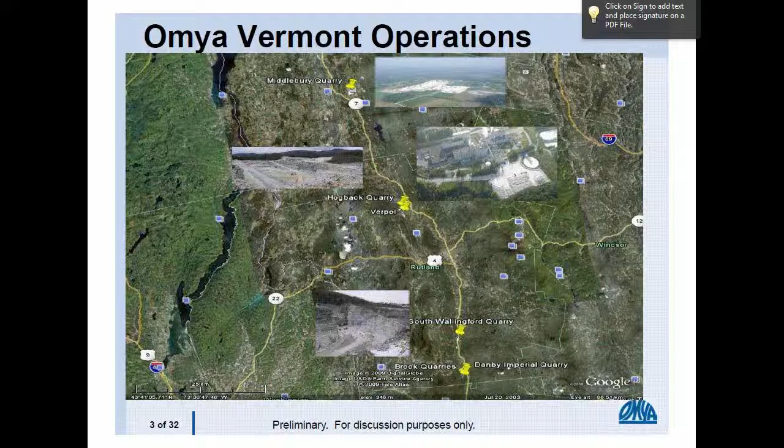Craig's going to be mad at me for not taking the South Wallingford quarry out of here. We did own 3 quarries, Middlebury being our primary quarry. We have an open house every October. If you have any geology background, it's a fun day to come to the quarry and see what we do there. But long story short, 80% of our feed comes from the Middlebury quarry. The other 20% comes from a smaller quarry just north of the plant in Florence, the town of Pittsford. South Wallingford we recently sold, and the high-quality stone has kind of been depleted there, so that's just an aggregate operation at this point.

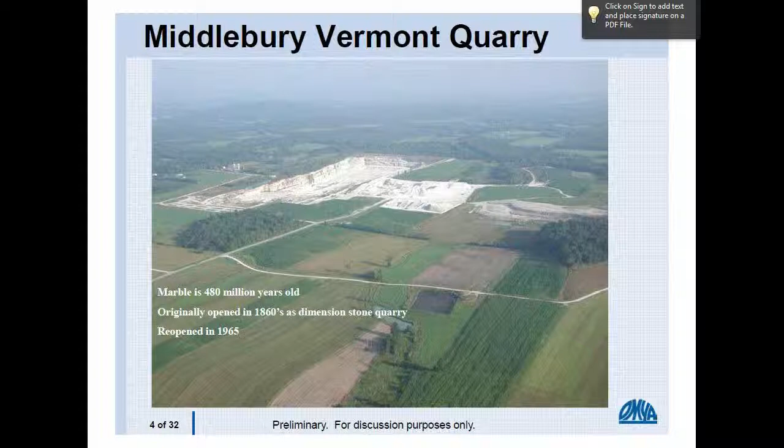Marble, obviously, for you geology people, is very old, takes millions of years to generate marble, but this is just a quick overview of our marble quarry. It was opened as a dimension stone quarry back in the 1800s, but we purchased it and reopened it in the mid 60s. Everyone always asks us what's the reserve there. We have well over 50 years further reserve in that quarry, so that's why we're here.

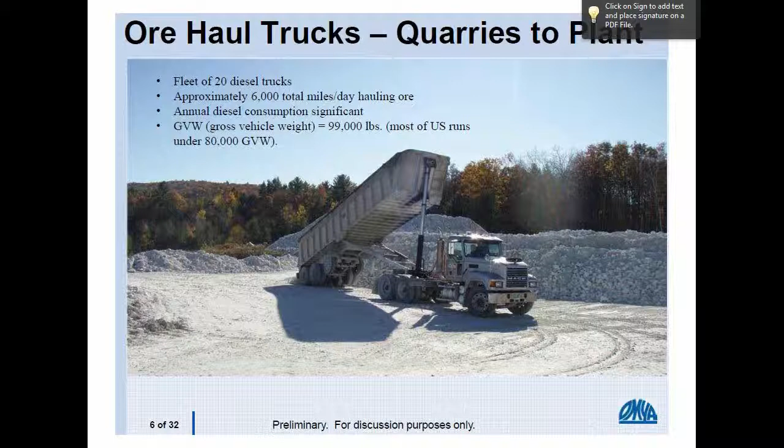Hogback, just a quick picture. Quickly hauling to the plant. This will kind of lead into, I won't talk a lot about it right off the bat, but we have to get the feed stone to the plant. Middlebury is about a 30-mile one-way haul, and we do that via trucks. You might have heard, years ago we were looking at a rail spur in and out of there. That obviously met a lot of opposition and became economically infeasible as well. But this will certainly come back into play in terms of our conversion to natural gas. We'll look at converting our transportation fleet at some point as well, but there's other priorities right now.

The processing plant, just a quick overview here. We're a wet grinding plant. We take in feed stone at 18-inch minus, and we grind it down to submicron, so 5 micron and less. Again, it goes into plastics, paper, paints, food and pharma, etc. I won't go through the intricate process here, but we're about a 1 million ton plant. We can sell our product primarily to the paper industry as a slurry product, so it's 70% solids, 30% water. But for the plastic and some of our other end users, we have to dry that wet slurry. You're catching on here that that's where we have dryers and thus we use fuel.

If I could interrupt you. Yeah, jump in anytime. When I first heard about 5 micron or sub-micron, it did hit home with me, but I think the human eye can only see something like 30 microns. So we're taking this 18-inch rock and grinding it down to 30 times smaller than the human eye can see. So this grind is very, very fine. And sorry to interrupt. Yeah, no, good point. I mean, our primary pre-grind operation gets it down to about, if you were to take 1 granule of baby powder, which would be very difficult to see, that's just feeding our fine grinding circuit, and that's about 30 micron.

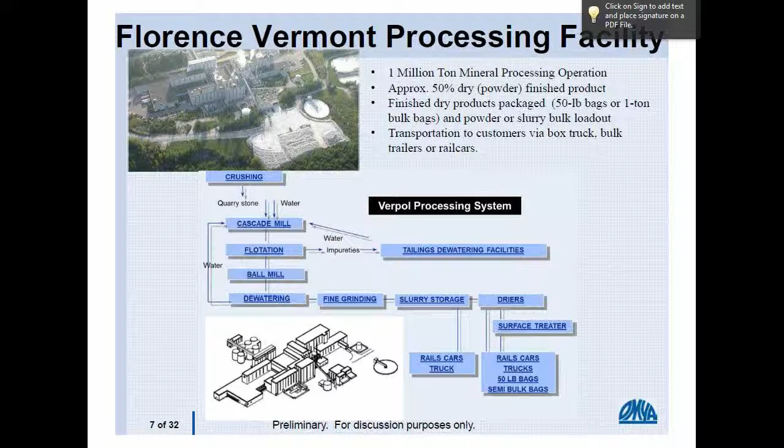We'll go into it, it goes into a lot of products. When you start working at Omya, you start looking at a lot of labels and finding out that there's a lot of mineral content and a lot of different things.

So if something says it has calcium carbonate, the odds are that it's Omya, or are there others? I'd like to answer yes, but we all have competitors. Omya is the worldwide leader in calcium carbonate production, but no, there are other companies out there, and of course I'm not going to tell you who they are because that would be free advertising.

Why are we evaluating alternative fuels? We just talked about that, feel free to jump in anytime. Obviously, to dry that slurry product and turn it into a dry powder for about 50% of our customers, that takes a significant amount of fuel.

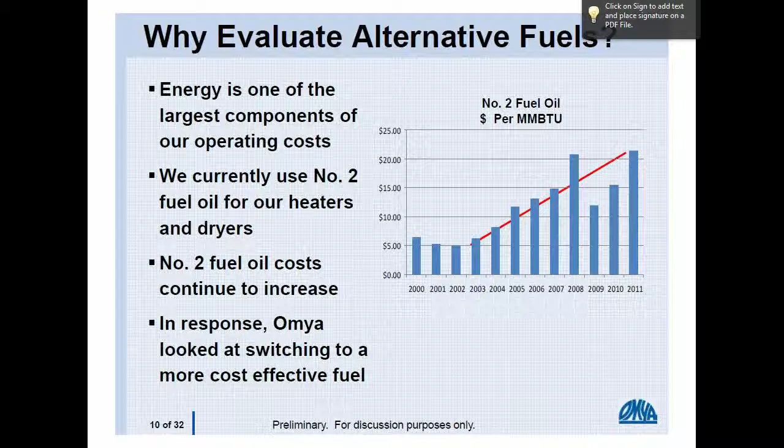Right now we use number 2 fuel oil, ballpark between 3 and 4 million gallons of fuel oil annually. Most of us have some interaction with cars and heating fuel, and we know what those costs are, and we know what they continue to do—they continue to go up.

So, with any process, any operation, we're looking for alternatives, looking to be more efficient, looking for optimization. In addition to consuming oil, we do a lot of grinding, which takes a lot of electricity as well. So this was kind of an energy question—where could we look at alternatives, and where could we make a significant improvement?

We always get the question, what about other renewable energies—wind, solar, biomass? Obviously we'd have to convert our boilers to whatever that alternative energy is. There is some progress with wind, but wind and solar really weren't feasible for us. Location is a challenge, and even though we're on a close to 400-acre site, we would have had to cover pretty much all of it with solar panels to get the equivalent energy needed for just the drying portion of our process.

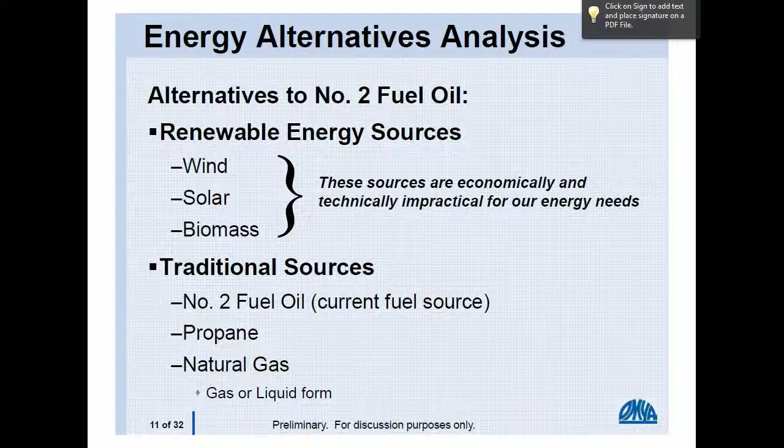So we started to look at other traditional fuels, propane, natural gas, etc. Certainly feasibility analysis comes into play. Natural gas showed a huge benefit—trends and forecasts seem favorable for converting to natural gas compared to fuel oil. Rough numbers, we're looking at about a 50% savings on our 3 to 4 million gallons of fuel oil, so the payback is pretty rapid, even with the investment you'll see in a minute.

Do you know if this analysis expects the price of natural gas to keep going down or stay level? That's what this tries to show—what is that 20-year projection? At least out 20 years we expect it to stay relatively stable, and we expect that differential to remain, so the savings should be pretty constant.

That being said, we like to protect ourselves, so the conversions we're doing to our dryers are going to be dual fuel. So if projections are totally wrong, we could go back to fuel oil.

Just one other comment, great question—natural gas is priced per million BTU, so you might see it termed MMBTU, which stands for million BTU. For the next decade, it's almost guaranteed that natural gas will be priced between $3 and $5 per MMBTU.

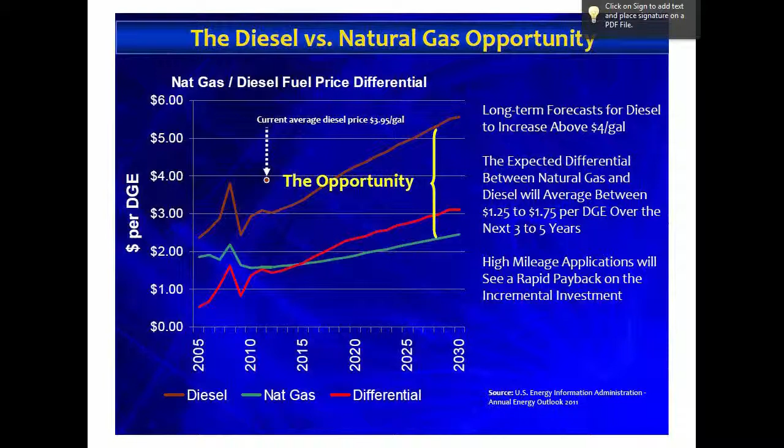As Mike and his team analyzed this project, they got firm pricing for liquid natural gas out to the year 2020—try to do that on diesel fuel. You can't get pricing for next month, let alone 2020. This is a very abundant fuel in North America; we're blessed with a great fuel, good pricing, and it's very sustainable just by converting. And as Mike will get to, we reduce our emissions by 25%, so everyone wins.

Any thoughts on potential impact on costs from increased regulations, for example hydraulic fracturing? That's a common question, and there's a lot you read about it every day—a lot of concerns about that. We think the regulations have escalated to a more significant level now. We don't expect the costs to change all that much more from where they've been in the last 5 years, but that's hard to predict.

Like with any new fuels or new technology, the regulations always kind of lag. We think they're starting to catch up, and we hope economically that doesn't change that forecast all that much. But yeah, it's difficult to predict, obviously.

So we talked about the economic advantages. Craig just mentioned the environmental gain. We're all going through the Vermont gas pipeline debate, and you read in the papers the controversy on that. Certainly as you burn the fuel, the emissions are significantly less. Environmentally, if you go back cradle to grave, all the way to how it's extracted from the earth, you'll get the argument that maybe the environmental gain isn't as significant as the users or suppliers are making it sound, but that'll be a debate for some time, I'm sure. Certainly for us and for our consumption right now, it's a significant reduction to what's emitted out of our plant.

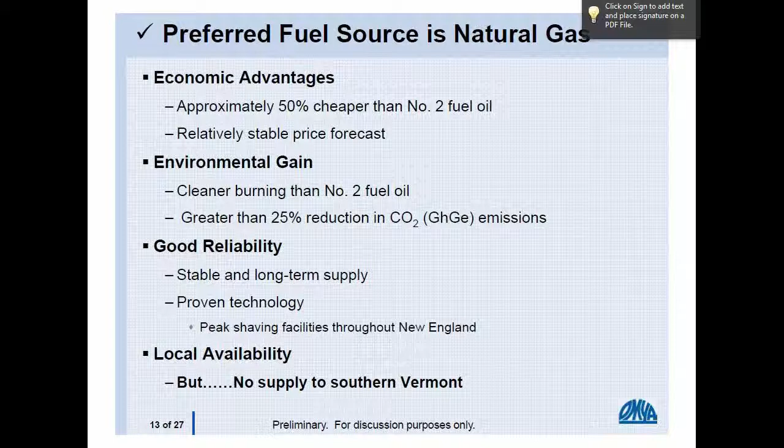We unfortunately don't have access to the pipeline, and that's what Vermont Gas is certainly trying to do. The Canadian source, as I note there, does pipe to this area—it's obviously pretty common throughout the Burlington area. We've all heard phase 1 of Vermont Gas's pipeline project is to get it down to Middlebury in the next 4 years. We'll see, and then beyond that, down to the Rutland area after that. So we look at a 7 to 10 year time frame before piped gas even becomes available to us.

So through all this analysis, we looked at the economics—check. We think it's well regulated. There's still likely more regulation coming to some of the fracking practices, but we think overall it's a pretty mature industry, pretty well regulated. NFPA does address a lot of the consumption and the equipment used for consuming natural gas. It's been in place since the 60s, with certainly many revisions thereover.

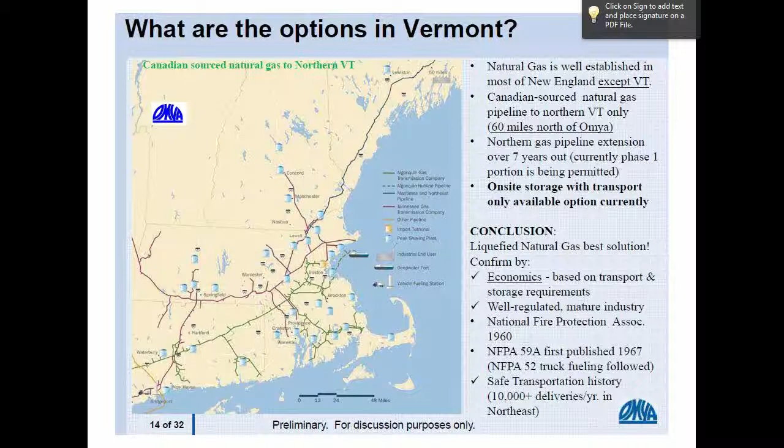A year ago, as we started looking at this, we really thought we were going to be supplied by a facility down off Boston Harbor. A lot of that was foreign natural gas—Turks and Caicos, I think, and Trinidad and Tobago—to get where I want a vacation versus where the gas is coming from—and it was coming in by barge. Since then, we've really started to look at domestic sources, and we're working through a contract right now with local sources in the Pennsylvania area, down in Reading. It's the Temple LNG facility, which has been in operation since '72.

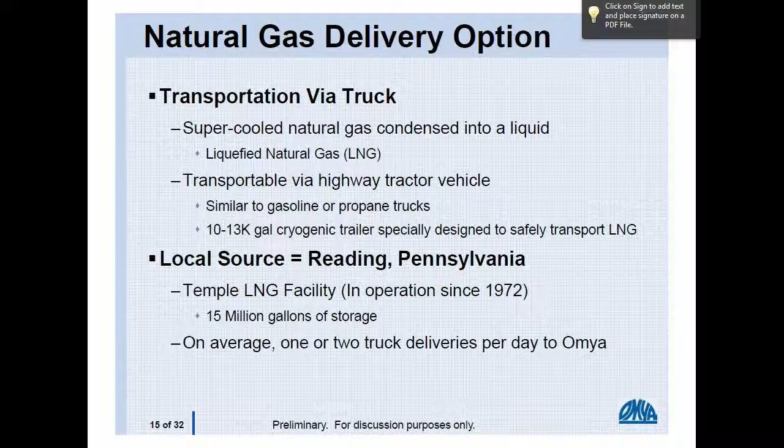We'll talk about the facility in a minute here, but we'll be looking at on average about 1 to 2 truck deliveries per day. So not a big truck traffic impact.

How does that compare with the fuel oil deliveries you have now? Yeah, this is going to spur some discussion as well, but right now our fuel oil is delivered via rail car. Rail is vital to our business—about 80% of Vermont Rail's business is shipping our product to our customers and getting oil to our facility as well. Regulations right now and infrastructure don't provide for natural gas to be railed in, in any way. We hope someday that changes, and certainly that's something we'd be interested in, having the rail access that we have now.

So anyway, this is just a quick opportunity here to talk about, obviously, whether you heard about it up here in the Burlington area or not.

This was deemed to be under the jurisdiction of the DPS and the Public Service Board. So Act 248 versus 250 seems a little odd because public service, right? They're looking obviously over our best interests, but this gas facility that we have proposed and are constructing is for exclusive use at our facility. We're not selling gas on the side to any other users.

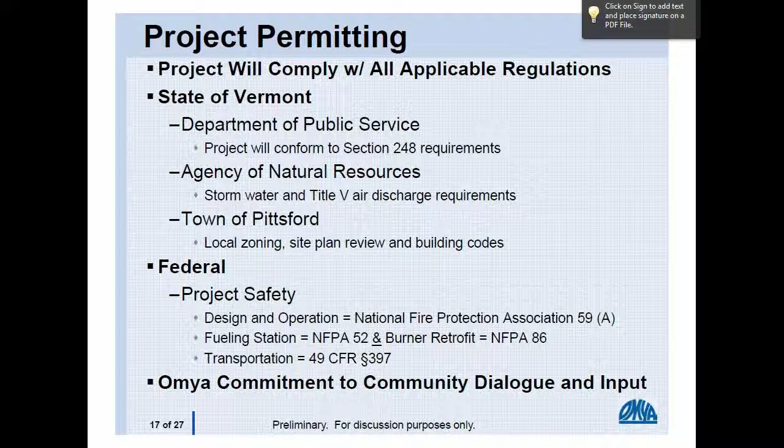I think one of the people that called in is one of our consultants. We went as far as looking at, okay, if there's a catastrophic event here, what's the thermal flux? What's the fire potential if, in the rare event, you have the right concentrations and an ignition source? For catastrophic failure, we're protecting our own employees and our own infrastructure based on this location, and we don't even come close to the property lines.

So a lot of that goes into the permitting. I always stick in here that permitting anything in Vermont is difficult. So fortunately, we have a lot of experience with it.

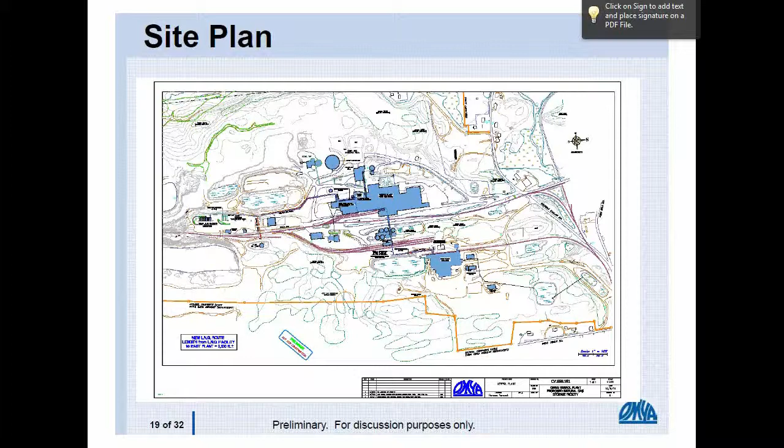Again, perspective here, just to show property boundaries, where some of the neighbors are, and where this facility is. A little scratchy here, but I'm going to skip right through that - that doesn't show you too much.

But getting trucks in and out of here, not only for deliveries, but also for potential future fueling of our ore trucks.

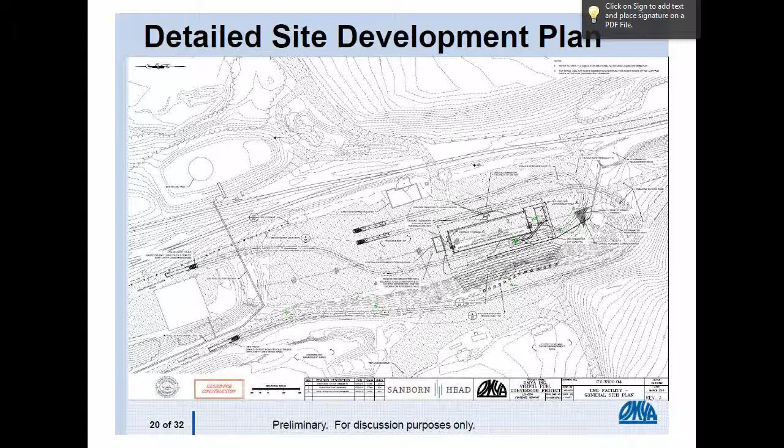Managing stormwater out there and tying that into existing stormwater features - I guess stormwater has been a big discussion on some of these brown bags. So, obviously we value stormwater at our plant more so than many, in that we consume a lot of water at our plant being a wet grinding process. So we harvest the stormwater at our facility. Anything that hits any part of the watershed throughout our facility, we're collecting that water and consuming it back into the process. So instead of discharging it off-site, we have stormwater conveyance, we have stormwater treatment, everything we would traditionally have, but we store it and then use it, and we recycle water around and around that way.

Just a quick general arrangement here. This is 8, 15,000 gallon vertical storage tanks, so we have 120,000 gallon equivalents of natural gas being stored there. These blocks you see on the left here are vaporizers. So obviously we're storing this as a liquid in insulated tanks, we're warming it up through vaporizers and feeding it to the plant. And the plant burns the natural gas.

Just two other things to show you here. Trucks come in, this is all obviously a secure fenced-in area. It comes into an offloading containment area. We also have offloading containment. This is all within a bermed area as well, as you saw on that.

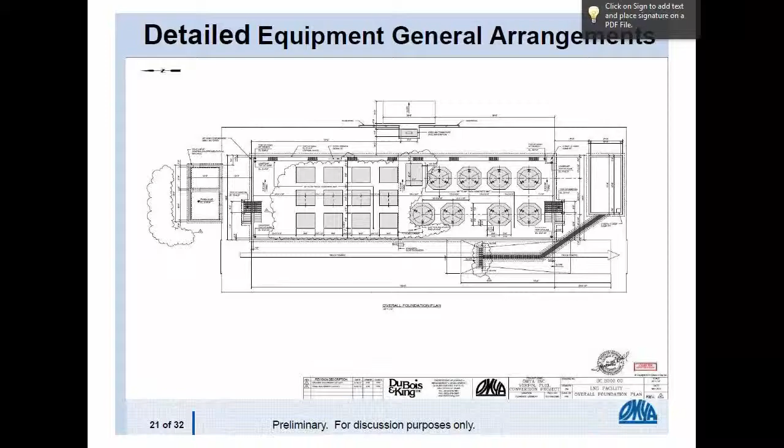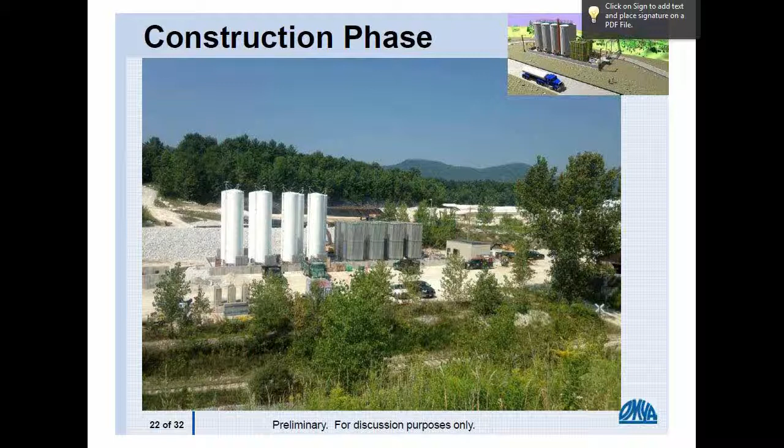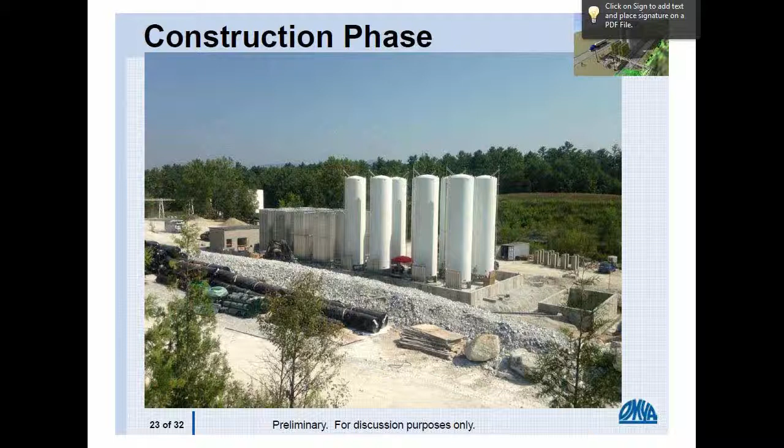Working on a lot of electrical, a lot of finished offloading area on the opposite side, instrumentation building to the right there. But again, this gives you a perspective of what it looks for. So you can see clearly the vertical tanks, the vaporizers. Our pipeline is buried to and connected to our existing fuel oil pipeline bridge, which takes it into the plant. And we have six dryers, two spray dryers and four flash dryers that we use in our drying operation.

Not going to spend a lot of time on this, but again, just some specifications on the tanks, on the vaporizers. You'll see the word icebreakers there. Obviously, even though we have cold winters here, this material is negative 270, so we're actually forming more ice from the facility itself than the Vermont winters. We do have some trim heaters, etc. I think snow removal is certainly going to be a challenge for us with any containment area. You drive around Vermont, you see containment for fuel oil. Well, again, gas in its liquid state before it vaporizes, you still have containment for that.

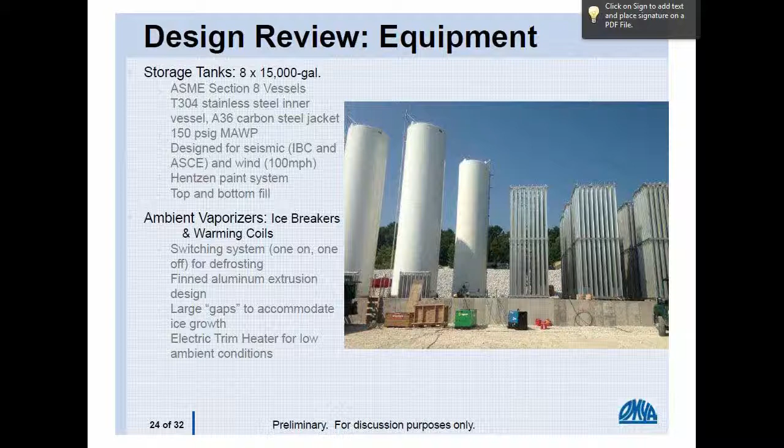Truck offloading, again, pretty mature, pretty established infrastructure for delivering via truck. This just shows you the back end of a truck. Connections are pretty straightforward. Offloading, Craig, is about an hour to offload a 10 to 13,000 gallon truck, I believe. You can see how the offload lines freeze up as they're pressing the liquid off of the truck.

Again, this will be pretty much automated, as tied into a lot of the automation in the plant. This isn't a manned system 24/7, so to speak, but it'll certainly be equipped with a lot of monitoring equipment, a lot of cameras. You can see from the control room itself and from any desktop within the plant, you can see the operations, you can see flows, you can see pressures, you can see temperatures, etc. So pretty automated system.

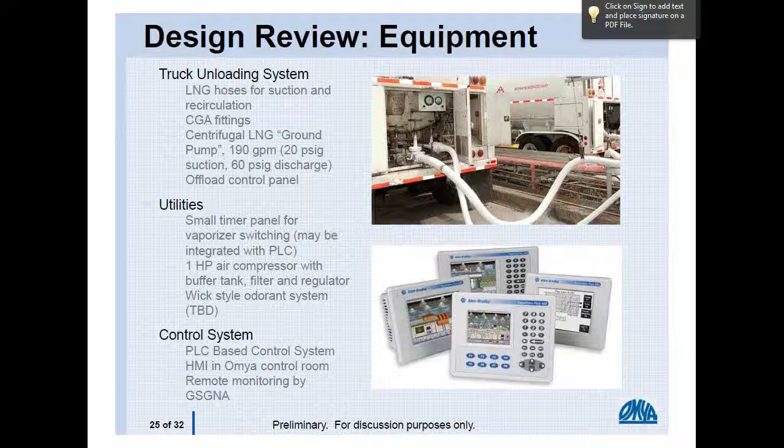Craig, I'm just going to skip over this. I know you have a few other slides on this, so I won't talk about that.

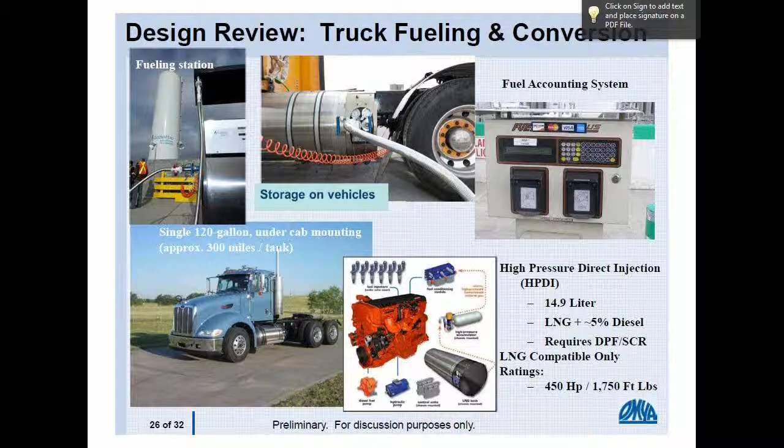But again, the real priority for this project, about 90% of our fuel oil consumption is through our drying circuit. The other 10% is the transportation, the fuel consumed during transportation. So the priority obviously was to target the drying system and get those converted, and this will be secondary. We did permit it at the time that we went through all the permitting, and it'll be an add-on probably next spring.

Again, time frames. We started a lot of outreach even before February 2012, but the real hardcore permitting was about a 200-day process. We were issued our certificate of public good from the Public Service Board in November of last year. A lot of design and equipment procurement, and then construction has been about a 9-month process. We should finish up ahead of schedule, about 45 days ahead of the schedule that you see. So we really are looking at commissioning starting in October, end of September, early October.

Obviously, this is a pretty high priority project for Omya America. Significant savings associated with this, so it's gotten a lot of resources and a lot of team effort on getting this through the process. And then, again, there's always questions, but we have been talking with Vermont Gas.

Not sure if you said one of them might be here today. Oh, okay, great. Owen, right? Incognito. Great.

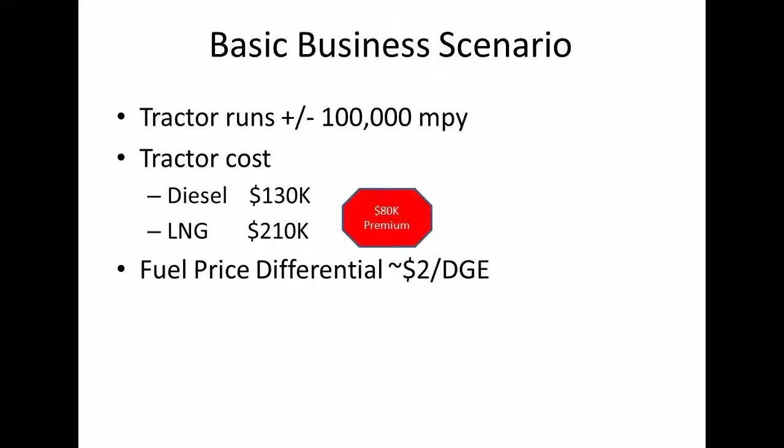Another variable to consider is the difference in price between diesel and liquid natural gas. Mike showed this number on another slide, but right now there's about a $2 differential. It costs $4 a gallon to buy diesel number 2. If we had a fueling station and went to buy the same energy content in the form of liquid natural gas, it only costs $2. Big differential here—this is the carrot on the end of the stick.

One other variable you need to consider is how much fuel a tractor burns. On average, a tractor pulling a standard 80,000 gross vehicle weight that you see every day in this community and others burns about 5 miles to the gallon. So that's the fuel efficiency. Knowing these variables...

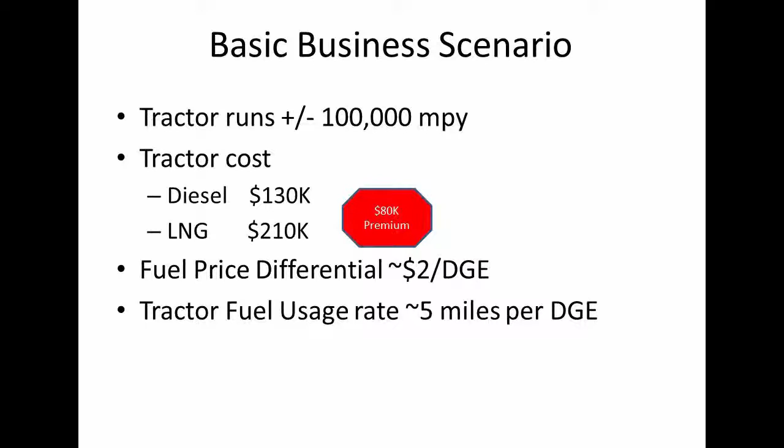There's an $80,000 differential on capital. How do we justify paying that extra money for liquid natural gas? Well, we saw fuel savings. Remember, the tractor runs 100,000 miles a year at 5 miles to the gallon, so it burns about 20,000 gallons of fuel per year. We get a $2 per gallon savings by converting to liquid natural gas. So the net savings, in very simple terms, is about $40,000 a year. That's a big number.

Does that justify paying $80,000 more for the machine? In our world, that's a 2-year payback. Paying an $80,000 premium for an LNG tractor, but gaining $40,000 in savings per year, in very simplistic terms, is about a 2-year payback. In the business world, that's a good project—we can sell these projects internally very easily.

What's the life of a truck in terms of mileage? Great question, and this is early adopter stuff, so we haven't seen one of these engines go to its full life yet. This technology's only been out for about 5 years. Typically a diesel tractor goes 1 million miles before it starts breaking down metallurgically.

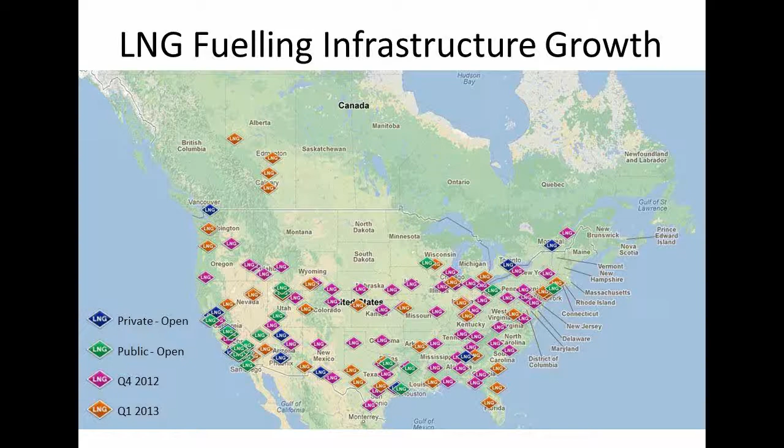It's all stainless, double-walled, vacuum construction. And it's supply and demand — there's really only one company that can provide this equipment right now, a good public stock by the way, called Chart Industries out of Minnesota. Again, supply and demand, they're sold out on these cryogenic parts.

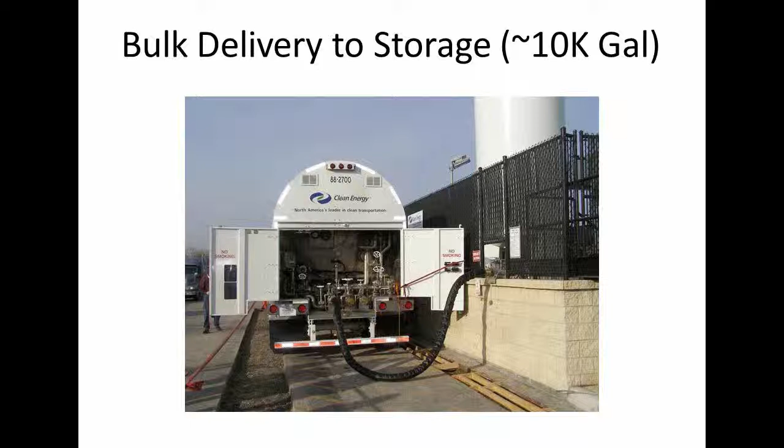So this is a fueling station, and this is a supply truck coming to refill it. In the systems most design, they put in accounting and security card readers ahead of the fueling station, so not just anybody can pull up and activate it. The dispenser looks pretty similar to what we're used to, but the nozzle's a bit more robust — it's a cam lock system, a male-female connection to ensure no leakage and a positive seal.

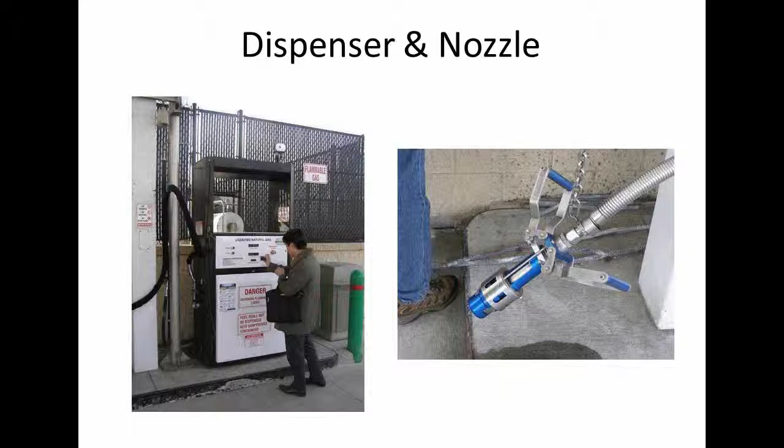Are the gas facilities in Montreal and Toronto self-serve, or are they attended? No, they're private stations, strictly held on private property, and their drivers are trained to operate the equipment.

I can't see my grandmother hooking up her car with those. Everybody's afraid of this. I haven't done it, but I've almost done it — I've been this close to doing it.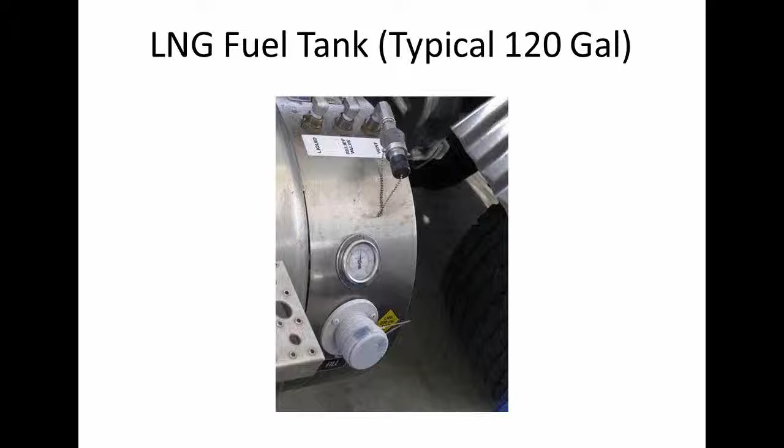It's pretty simple. This is the receiver on the fuel tank — looking at the fuel tank, you can't tell it's LNG. But the dispenser just connects here, and you offload the fuel.

Here's another problem, again chicken versus the egg. We have a bunch of engine alternatives out there, however if you read the fine print and look at the launch dates, the only two available to any of us right now are this 9-liter spark-ignited engine — an Otto cycle, similar to our gasoline engines — and then the other option, way out there, a huge 15-liter engine that runs on the diesel thermodynamic cycle.

Because it runs on the diesel cycle, the current design still uses approximately 5% diesel in the fuel system. I'll show you how this works in a second, but that was addressing your question on gelling — if you use this bigger engine, you still have diesel, and you still have to treat the machine as if it were a diesel unit. You'd have to plug it in during winter and maybe convert to diesel number 1 in cold temperatures; you still have the same challenges, you're just not burning as much of it.

But again, we have two options: a 9-liter and a 15-liter, with a big gap in between. This ISX 12-liter is just coming out right now, and it's a beautiful engine made by Cummins. It's a spark-ignited engine, but it'll give us 400 horses. It's getting pretty darn close to what we need. This will pull at least an 80,000 gross vehicle weight, which you see on the highway systems. Another one coming out next year at about this time by Volvo is a 13-liter. That's going to be a beauty.

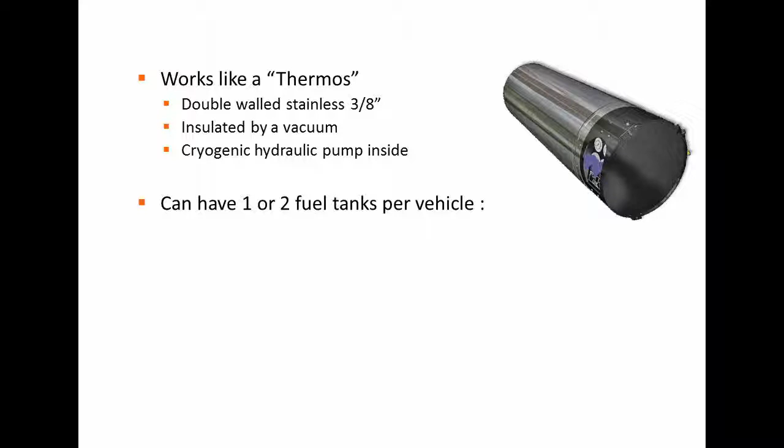The fuel tank, again, is like a thermos. You can put 1 or 2 of these on a vehicle. Each fuel tank is typically 120 gallons, gives you about 300 miles. So if you have 2 tanks, you get about 500 to 600 miles. Inside the fuel tank, you have a submersible pump. So this depicts an LNG fuel tank, and this depicts a diesel fuel tank, so you have both on the same machine, on the same tractor.

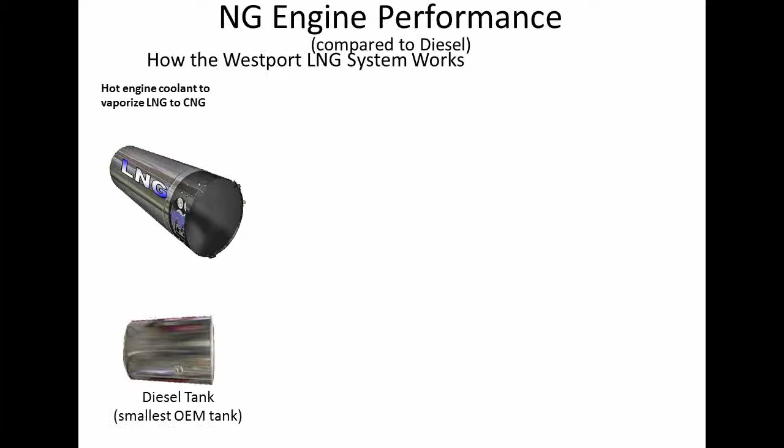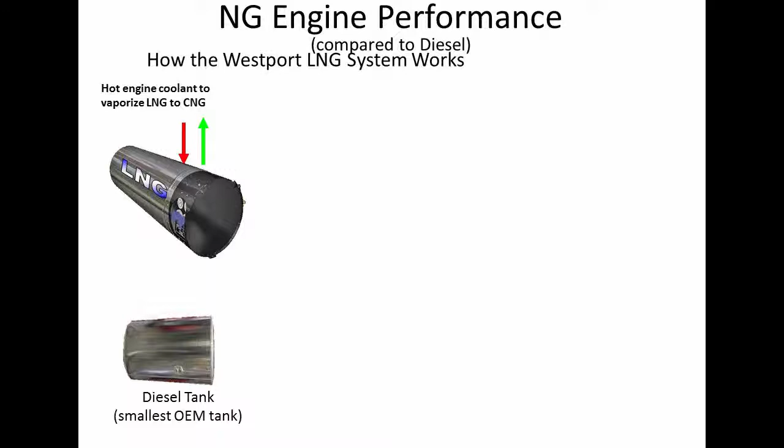Your engine puts off a lot of heat. That heat is transferred to a coolant. The pump from the LNG fuel pumps liquid natural gas to come into an indirect contact with the coolant lines off of the engine, and that causes the liquid to flash to a vapor. Once it's in a gas form, it's captured in a receiving tank, metered to about 4,600 psi. It's filtered, and diesel comes into the engine, pretty traditional through a filter, a traditional pump.

Everything comes into this control module. And from the control module, both of these fuels feed a kind of a dual-purpose injector that injects the fuel into the engine. The center post on this injector is your standard diesel. So the way this works is about 5% diesel is squirted into the cylinder walls. The piston compresses the diesel and it ignites. As soon as it ignites, the natural gas is metered into this arm of the injector. So 95% of the heat value comes from the natural gas. The diesel is just used as like a liquid spark plug. So it ignites the fuel, starts the power stroke, the natural gas is interjected, completes the power stroke.

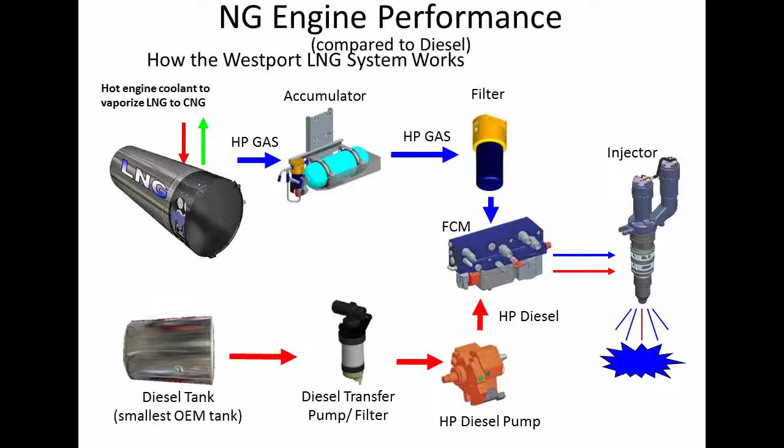Pretty ingenious. I mean, very simple design. So we as scientists haven't had to go out and reinvent the engine. We've just reinvented the injector and control mechanisms. This is a real busy slide, but just want to point out that spark-ignited engines are nice. They give a real clean burn, but they just don't give us the horsepower and the torque we need in the industrial world. So we'll always have to stay in the diesel world for driving off-road equipment and big highway trucks. The beauty with this high-pressure direct injection natural gas system is it gives us the beauty of the diesel power and torque, but we can convert to natural gas.

Just one other food for thought, and this was just announced in the last month. One of my favorite companies, I've always driven Ford F-150s. Very nicely run company, run by a guy named Alan Mulally. Very forward-thinking, very good with their sustainable development programs. They just announced a partnership with this company called Westport about a month ago, and they'll be powering the Ford F-150 as an option to be used. We can use natural gas in the future, as soon as the stations arrive, so we can fuel up the machine. But kind of a neat contribution to society, not only in the industrial world, but now a consumer product. And good for Ford for that forward thinking.

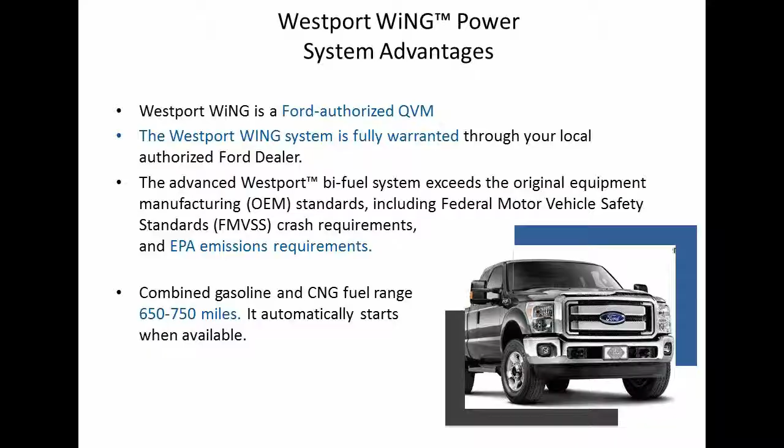Would you say that one con might be that when you take power into account, the amount of horsepower you get for your rolling stock, for example, there are some constraints there that might be kind of limiting for the industry? Or you mentioned the hybrid diesel natural gas, HD — I forget the acronym — is that as much a limiting factor at this point? It is at this point, but let me get back to this slide right here.

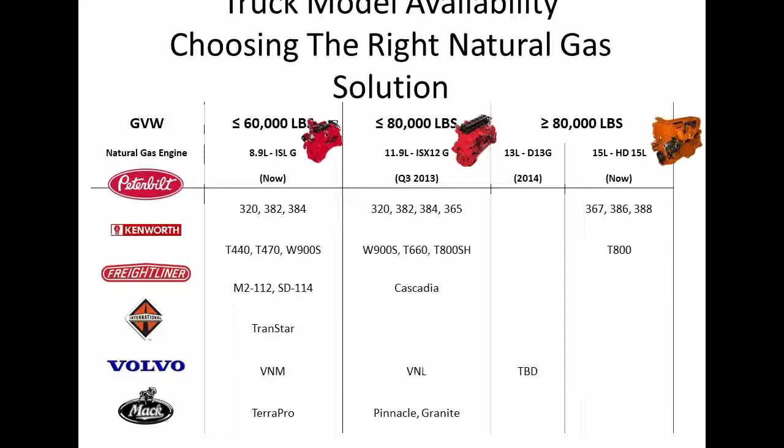Cummins right here is, in my opinion, the best engine manufacturer in North America, perhaps the world. Right now they're working on a 15-liter engine that'll be pure natural gas, with no diesel in it whatsoever. It'll probably be spark ignited, but we don't know that for sure. The launch on this thing is a couple of years out, but if they are successful with their projections, they'll be able to put a straight natural gas engine in these big trucks.

So we're not locked into this dual fuel concept, but the technology is so new. It's just developing monthly right now. We're trying to catch up all of a sudden.

How about Caterpillar, John Deere, some others? Are they getting into this at all? They are, but they're not trying to do it on their own. They're working through a company called Westport. Caterpillar has small, medium, and really, really big equipment. Their big equipment, like a truck, starts at a couple hundred tons and goes all the way up to 400 tons of payload. That's 4 rail cars in one truck. These are big trucks, so Caterpillar's expending their energy right now on the big machines.